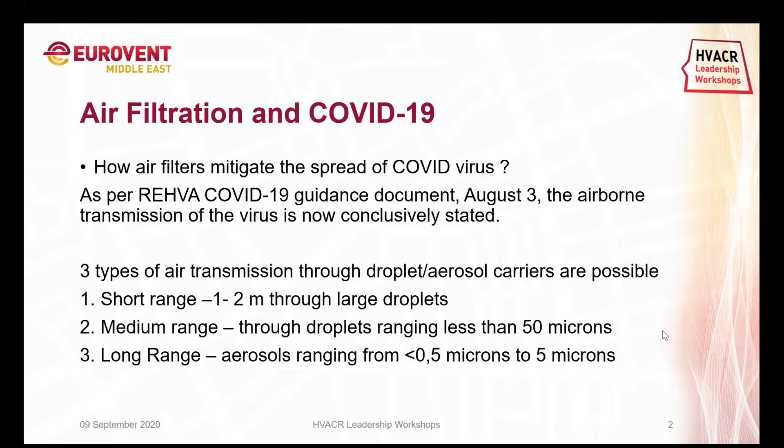And the most important one for us in the ventilation industry is the aerosols. We're talking about very small droplets, less than 5 microns in diameter. They are able to travel much further and can be transported by a recirculation system or by a ventilation system in general.

To visualize that, we have a nice graphic from the WHO, where you can see droplet transmission on the visible part. Then we have the intermediate area with smaller droplets. And on the right-hand side, you see the very tiny particles, less than 5 microns, the so-called aerosols. They are responsible for the airborne transmission because they can be transported over quite long distances.

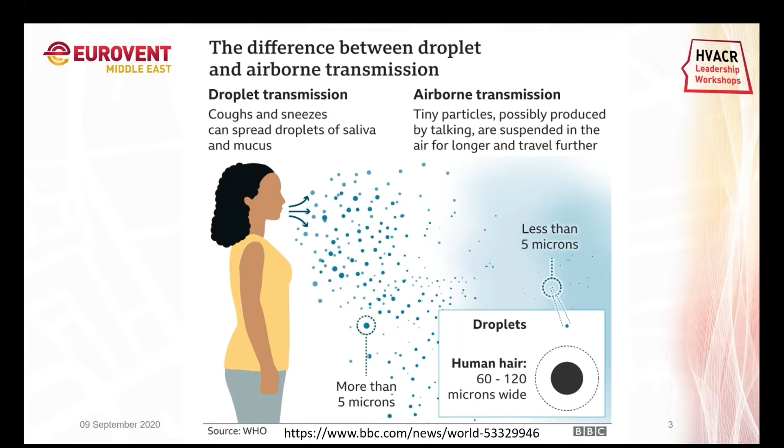So looking again at what the REHVA guidelines actually say and what recommendations do they give: in total, these guidelines have 15 checkpoints to optimize your ventilation system for COVID-19, and 8 of these we see here on the left-hand side.

Sorry, I have to interrupt. I hear a telephone ringing. It's not on my side. That's very weird. Thank you, it has stopped. I don't know where it came from. So it's definitely not here.

Good, okay. So 8 of these checkpoints are directly related to filtration. And if you look at them, you will see it's not easy to follow all of them, especially in the climatic conditions of Middle East, because switching off the recirculation air completely and only bringing in supply air is not always an option.

So what can be done? The other option, if you need recirculation air, is to improve the filtration of that recirculation air. The recommendation from REHVA says use a HEPA filter in there.

Well, this is easier said than done, because not all recirculation systems will be able to take the additional pressure drop that a HEPA filter will bring to the system. If you can do it, good solution, but in many cases that will be difficult to do.

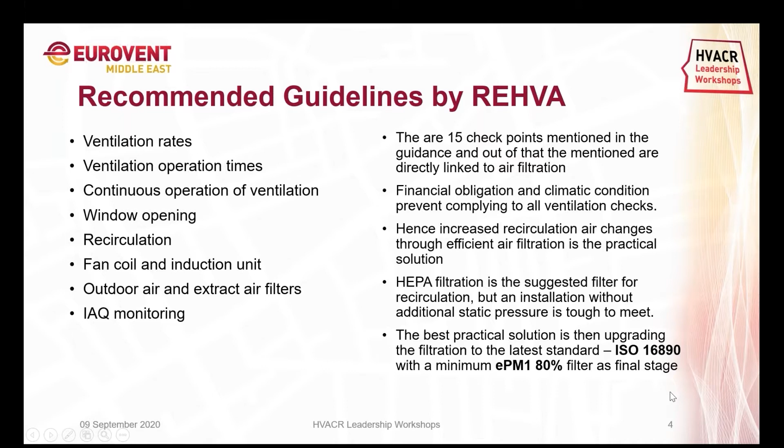So what is ISO 16890? It is actually the latest and up-to-date air filtration standard for normal ventilation air filters. It fully replaced EN 779 in 2018, so there are no more classes like F7, F8, F9 - that doesn't exist anymore.

The new classes, according to ISO 16890, would be EPM1 60%, EPM1 70%, or 80%, meaning a filter would filter out 60, 70, or 80% of particles below 1 micron.

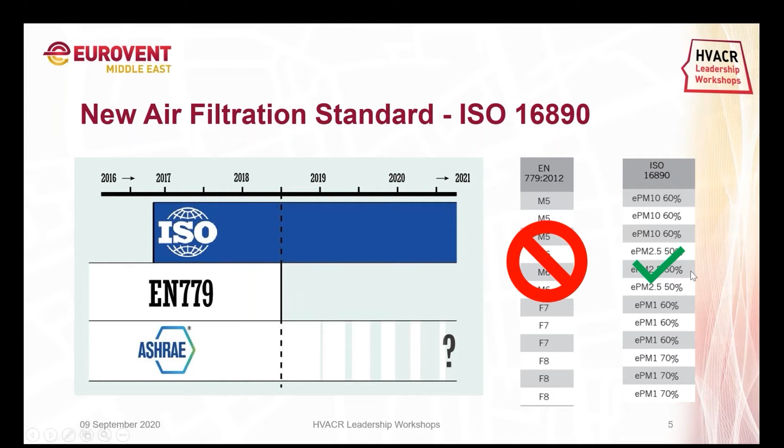So let's first look at supply air, because the REHVA guidance actually says bring as much supply air in as possible. But how should you filter your supply air?

For that, there is a very good recommendation from Eurovent, the Eurovent recommendation 4/23. And this is applicable not only in times of COVID, this is a general recommendation, and it works in different steps.

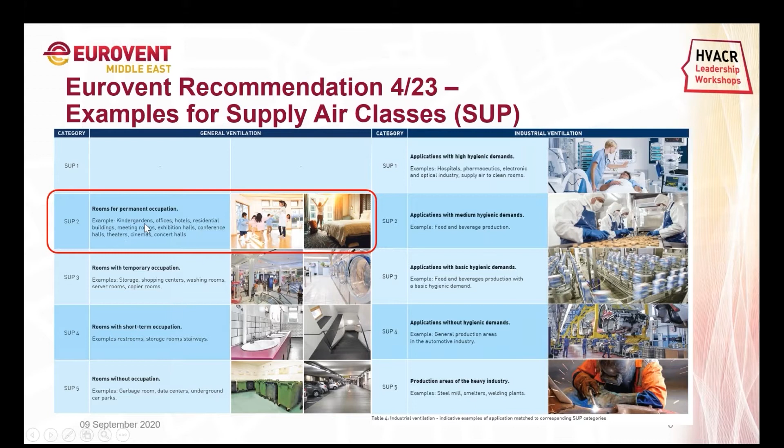First, it classifies the supply air quality, as you can see here on this one page from the recommendation. Let's assume we're talking about an office building. An office building would be a room for permanent occupation, so the recommended supply air quality would be supply air quality 2.

The next question is, of course, where is your building located? How clean is the outdoor air? As office buildings are normally in cities, we should assume that the outdoor air quality will not be perfect, so we should assume outdoor air 2 or 3 as a quality.

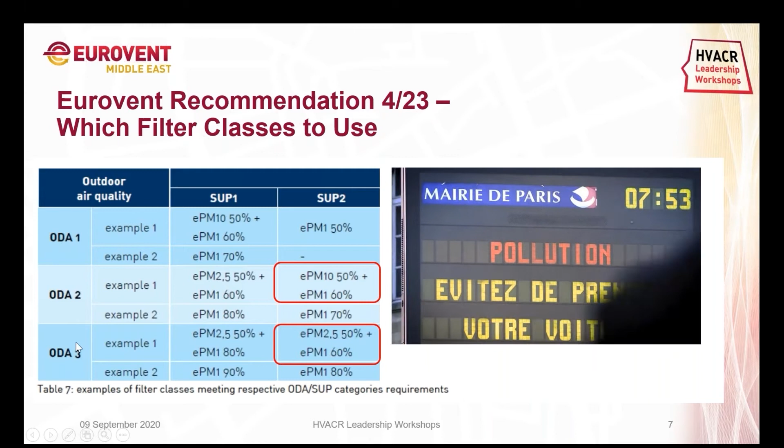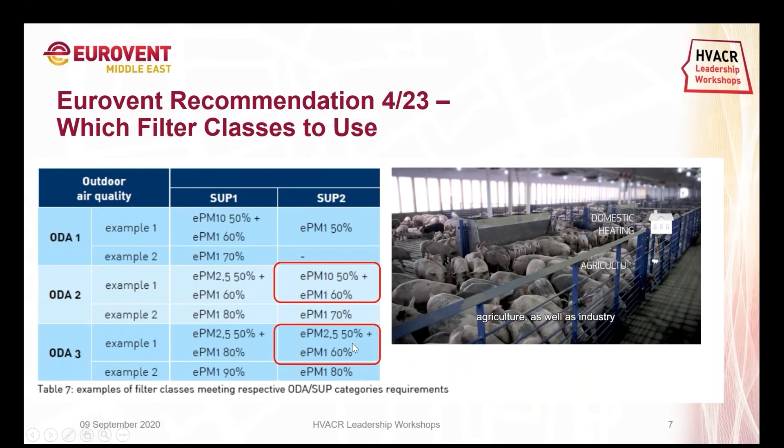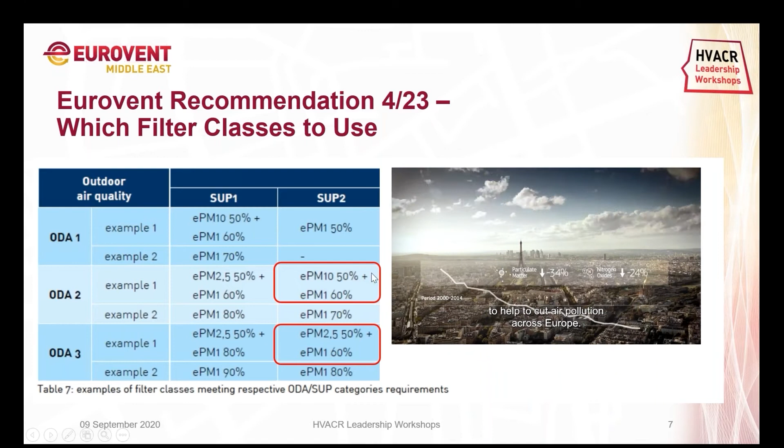And there we end up directly with a recommendation for which filters to use. If you look at these two recommendations, you will see in both cases the recommendation would be to use an EPM1 60 filter as a final filter in the supply air, plus a good pre-filter to protect your system - hopefully not looking like some of the pictures we've seen in the last presentation.

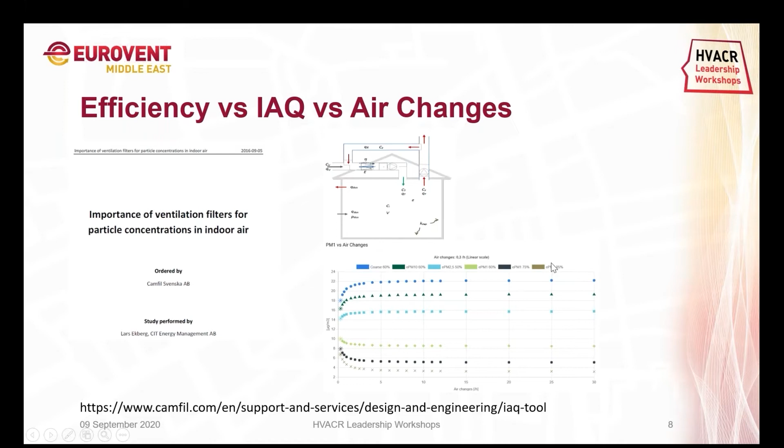If you want to learn more about how the choice of filter classes works in your specific system, there's an online calculation tool available on this website, free of charge, where you can model your building, including air changes and recirculation rates, and choose different filter classes. It will give you an indication of how the filters would influence indoor air quality. This calculator is based on a scientific study by Professor Lars Ekberg from Sweden, and it's available free of charge on this website.

Let's come back to recirculation air, because that's where the main problem occurs with COVID-19 and possible aerosol transmission. We see here an overview of different filter classes: ePM1 60, ePM1 70, and ePM1 80 and 85 filters, and their actual efficiency against different particle sizes.

Aerosols are below 5 microns and can go down below 0.5. So let's take the worst case here, the small particles, 0.3 to 0.4 microns, which would be very small aerosols. You can see that an EPM 160 filter would have at least a 50% efficiency at these sizes, and the bigger the droplets are, the higher the efficiency, up to more than 70% as we get close to 1 micron. Same logic for EPM 170, starting at around 60%, going up above 80%.

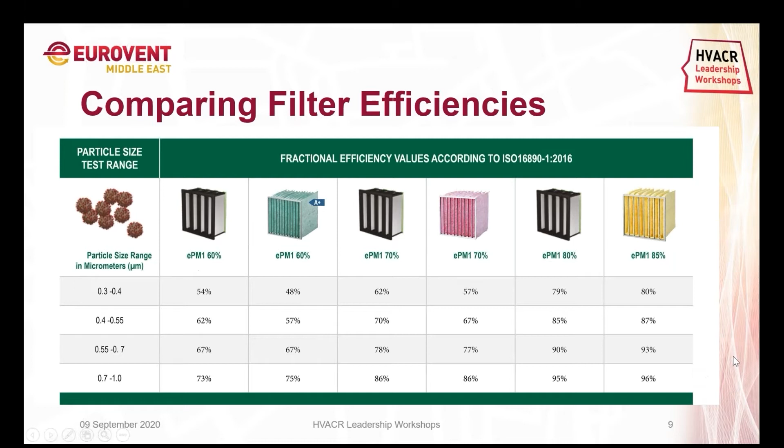Is that enough? For supply air, yes. For recirculation air, you should at least use an EPM 180, and you can see that easily from these results. We're talking about very small aerosol droplets, and those filters would take out 80% at 0.3 to 0.4 microns, and at 1 micron we are above 95% efficiency. So for recirculation air, if you cannot avoid it, use at least an EPM 180 filter.

That's why we've shown this in a different way on this diagram. On the x-axis, again, particle size in micrometers, and on the y-axis, percentage of filtration efficiency. Down here we see some viruses, and in case of tuberculosis, a bacteria, so we see the different size ranges. The COVID-19 virus is somewhere between 0.08 and 0.16 microns.

As you can see from this graph, if you look at the light green or blue graph, which represents a PM 2.5 filter, former M5, M6, the efficiency at small particle sizes is definitely not enough to give you sufficient protection. The dark green represents an EPM 160, and up here in black you see an EPM 190, with EPM 180 slightly below that. So you can easily see that only as of EPM 180 or higher would you get good protection against small droplets or even single viruses.

If you want to go the whole way and make the perfect solution, here's the red line, which is an H13 filter, which brings you nearly 100% efficiency. I will come to it in more detail because it's not 100%, it's just close to 100%.

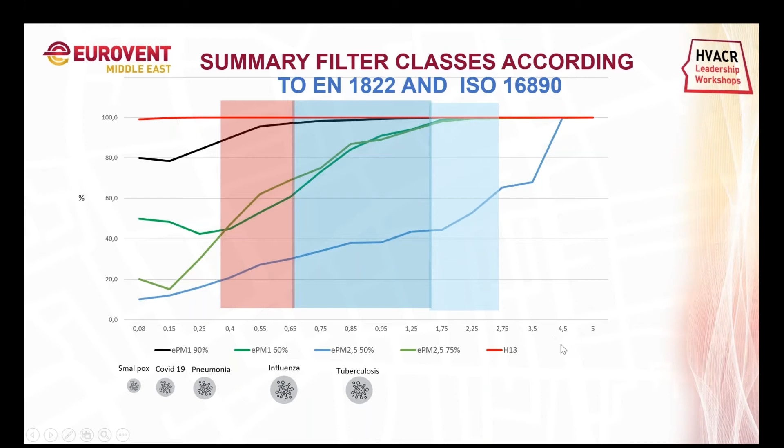So what can you do? As said, it will be difficult to get HEPA filters in the recirculation air in many cases. And if your building, for instance, is not using a central air handling unit, but uses fan coil units or other applications which don't give you the possibility to bring in high-end filters, the other solution to improve indoor air quality would be the use of air cleaners. This is also recommended in the REHVA guidance documents, which clearly recommend using air cleaners with HEPA filters.

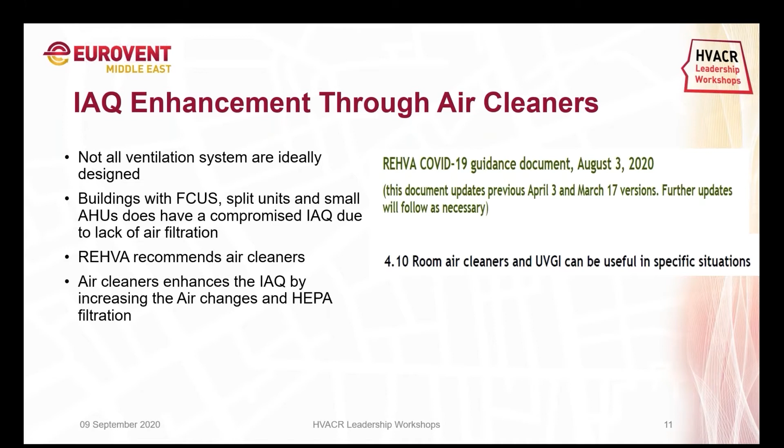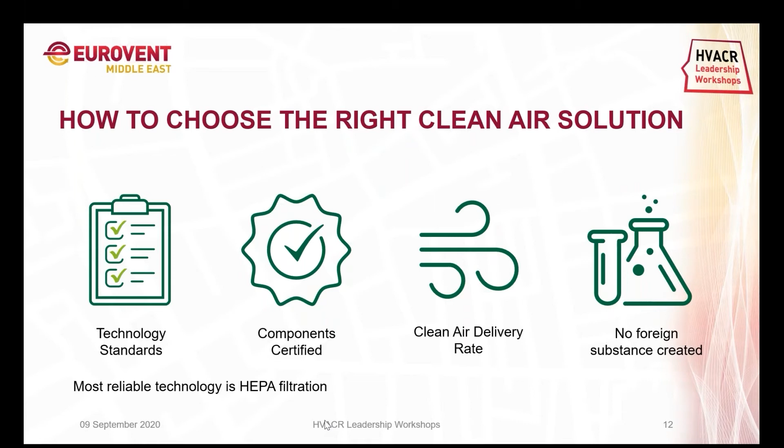So what should you look at if you select an air cleaner for your room? Look at the technology standards. Do the filters really fulfill the latest standards? For a HEPA filter, that's EN 1822. And of course, are the components in the units actually certified? What is the clean air delivery rate of that air cleaner? Is it actually sized correctly for that room? And an important one: does the air cleaner create any foreign substances, like ozone, which is created in some cases and is also hazardous to people at certain concentrations? You should avoid that. That's why the most reliable technology for an air cleaner in general, and especially in times of COVID-19, would be the use of a real HEPA filter.

So what is a HEPA filter and how does this filtration actually work? I will give you a brief overview of filtration efficiencies and the different types of filtration that exist, because filtration is not one physical thing, it's a number of different effects. On this diagram, again, we have particle sizes on the x-axis and filtration efficiency on the y-axis. You can see we start very high at 99.93 and go up to 100, because we're going to look at how a HEPA filter actually works.

If you think about filtration, many people just think about impaction, straining, and sedimentation effects, the ones visualized here on the right-hand side, which work more or less like a sieve. But that's only part of the truth, because these effects only work at bigger particles. You see, it starts somewhere at 1 micron, and the bigger it gets, the better the efficiency. What we want to filter in this case is much smaller particles.

To do that, you use another effect, the so-called interception, which could have been seen on some pictures in the last presentation—small particles getting stuck to the fibers of the filter.

And this interception works down to definitely below 1 micron, down to 0.1, but obviously decreasing. And the last part of filtration is a so-called diffusion effect, which you can see here in red. Very small particles have a strong tendency to move randomly in the airflow and then stick to the fibers of the filter.

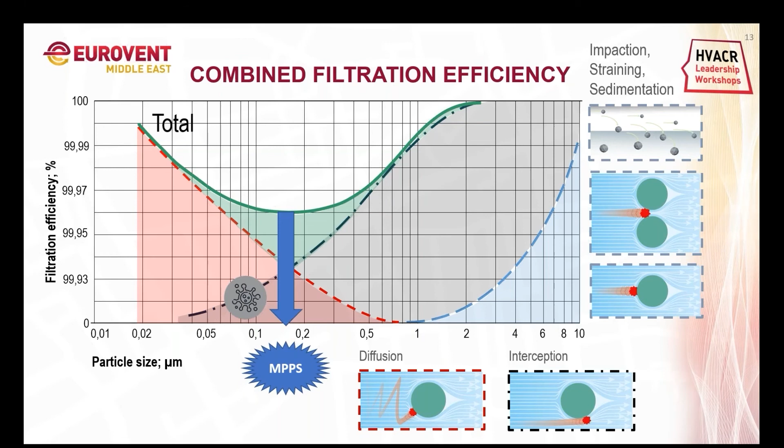So having said that, by using a real H13 filter according to EN 1822, you have very good efficiency, 99.95%, both at MPPS as well as even on a single virus.

What's important to say about HEPA filters—one of the last things before I'm over with my presentation—if you purchase an air cleaner with HEPA filters, make sure it's a real HEPA filter according to EN 1822. The reason I'm saying that is there are products on the market using so-called HEPA-like filters, or like HEPA, or true HEPA, or whatever other creative wording they're using. Those filters are not HEPA.

This might sound a little picky, but I will show you in a short movie how the difference could look like.

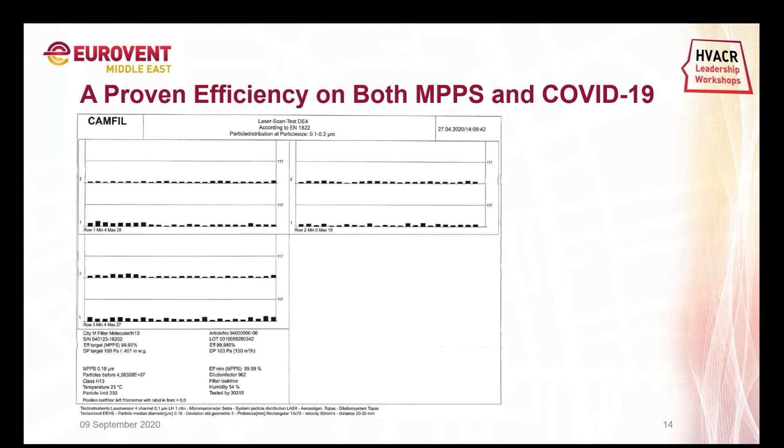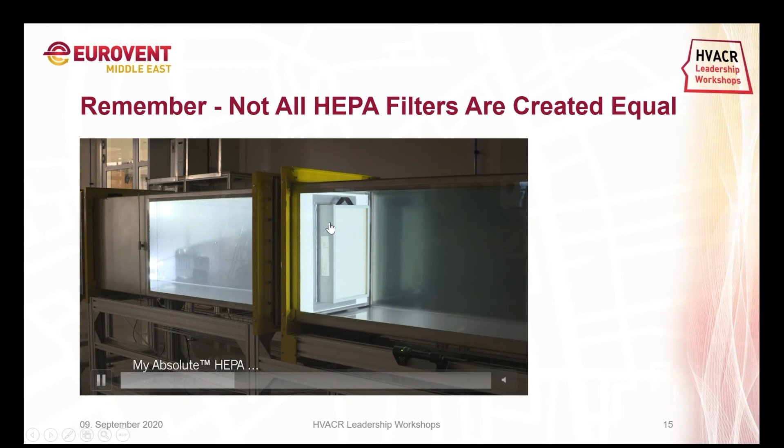We tested here two products. The one we see here is a real HEPA filter according to EN 1822, and this is a so-called HEPA. We put those in the same test duct, turned on some artificial smoke, and as you can easily see, the HEPA filters out everything. The so-called HEPA doesn't do it.

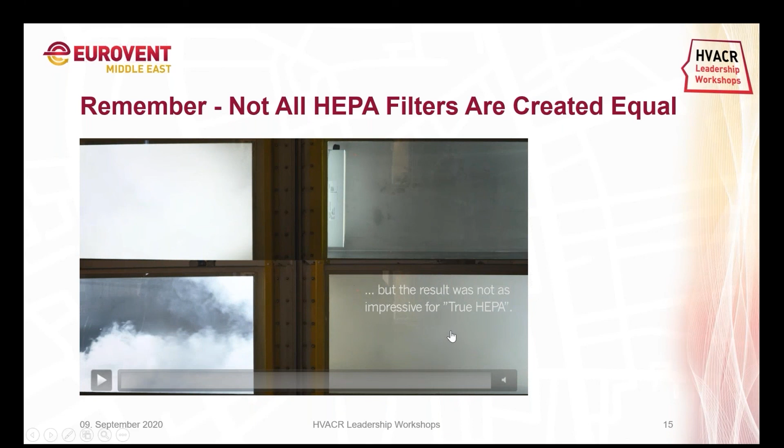So when you choose an air purifier, an air cleaner, make sure it comes with real HEPA filtration.

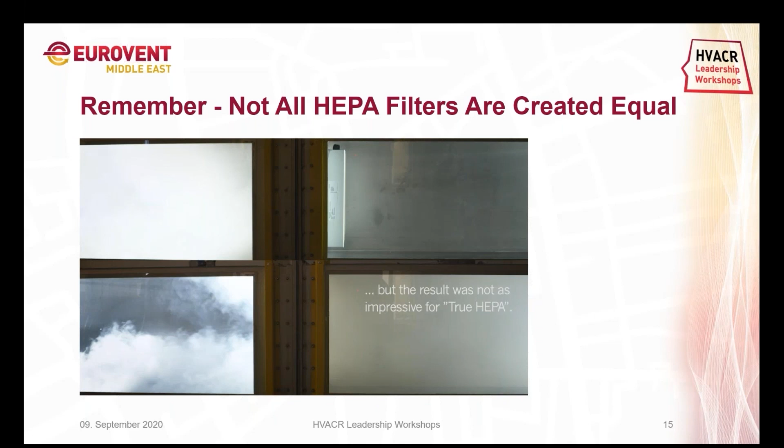Thank you, that's all from my side. Thank you, Tobias, excellent presentation.

One question up front would be: how do we make sure it is a real HEPA filter? What can people do to make sure it is a real HEPA filter?

First of all, it needs to be confirmed by the manufacturer, and HEPA filters come with a scan test protocol, as we've seen on one of the slides, so that you can really see: was that filter tested? Is it a real HEPA?

So if the manufacturer is not able to show a test certificate or to confirm that this is really HEPA according to EN 1822, then you should be very suspicious—you probably have something with a so-called HEPA in front of you.

That means people should always watch out for this scan test, the scan test report, and a clear confirmation of H13 or H14, not just the word HEPA. HEPA means it's H13 according to EN 1822 or H14 according to EN 1822. Anything else, if that's not clearly confirmed, is not HEPA.